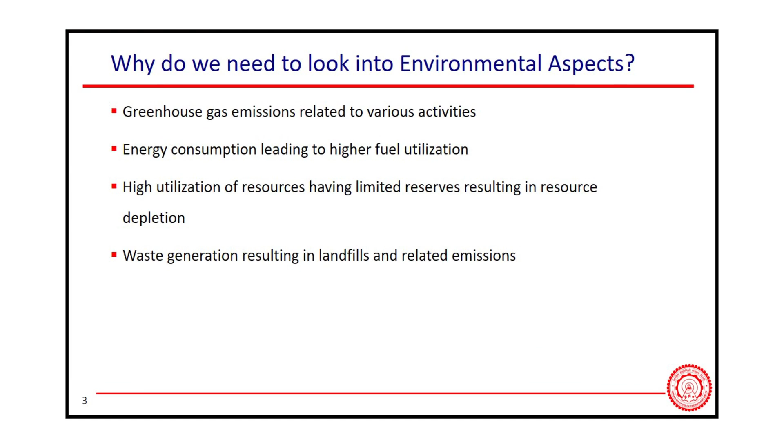So why do we need to look into these environmental aspects? First is the greenhouse gas emissions. We all know this is a major topic nowadays, a topic which is of a bit more concern when we talk about cement. Why? Because these greenhouse gas emissions lead to the global warming effect, and this global warming effect is leading to climate change. Thereby, this is a very important topic that we need to look upon.

Next is the energy consumption. Obviously we are utilizing resources, we are getting new products, thereby we are utilizing more energy, which requires higher fuel utilization. Next is the high utilization of resources, because we are getting new products, so we are utilizing resources. So we need to be energy and resource efficient when we talk about sustainability. The fourth point is waste generation. We all know the 3 R's: reduce, reuse, recycle. We talk about that because we want to reduce our waste, or we want to utilize the waste.

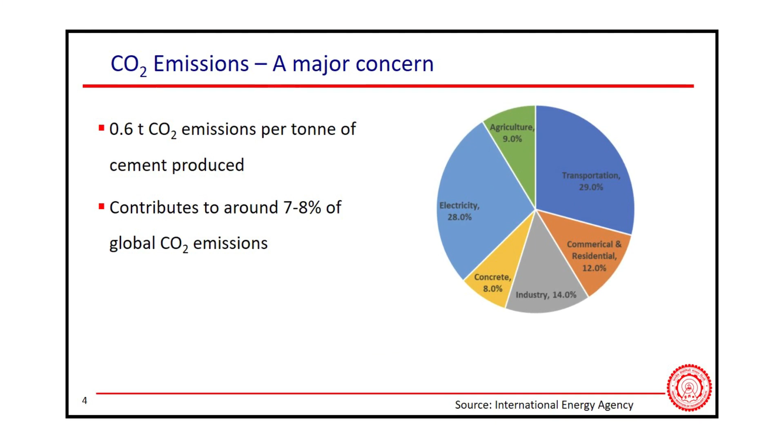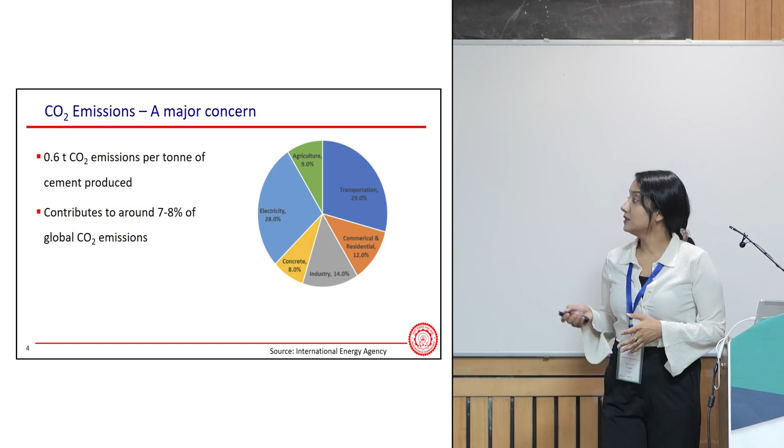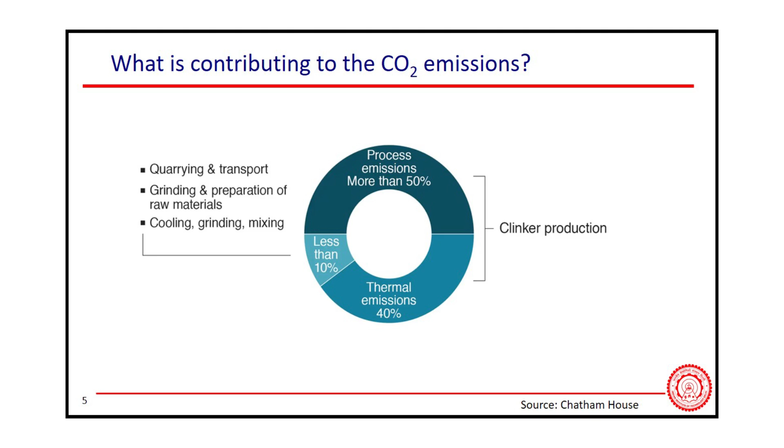Next, coming to the most important part when we talk about cement in terms of environment, is the carbon dioxide emissions. With every ton of cement produced, we get 0.6 ton of carbon dioxide emitted, contributing to around 7 to 8% of the total global carbon dioxide emissions. So what is contributing to these emissions? As my fellow mates and Professor Bishnoi have talked to you about the production process, we know the various steps. We can see here that clinker production has led to more than 50% of the carbon dioxide emissions among the various processes of cement production.

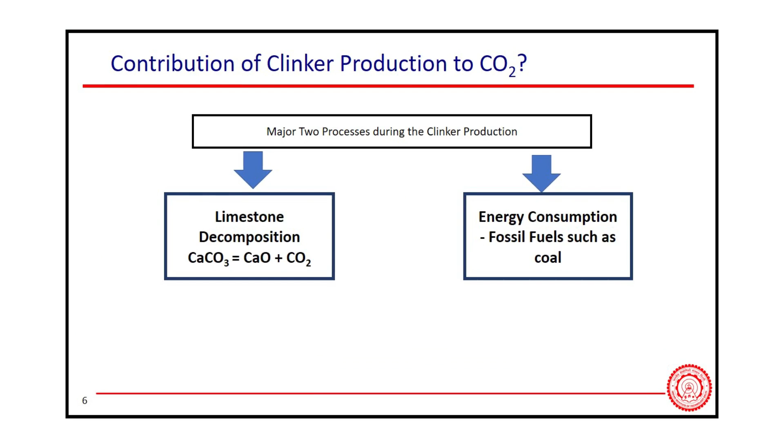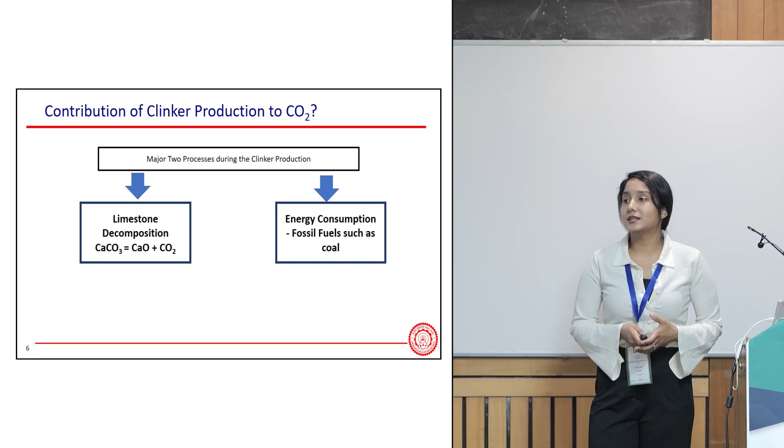So what processes lead to this carbon dioxide emission during clinker production? The major two are limestone decomposition and the energy consumption in terms of fuel. We are utilizing a temperature of 1500 degrees Celsius for clinkerization, and that leads to decomposition of limestone. With every molecule of limestone decomposing, 1 molecule of carbon dioxide is emitted. And for the 1500 degrees Celsius temperature, we need fossil fuel energy, and we are generally burning coal, which leads to higher carbon dioxide emissions.

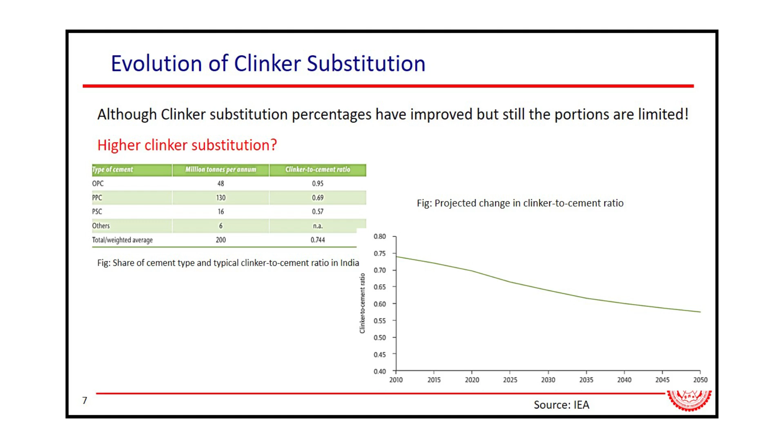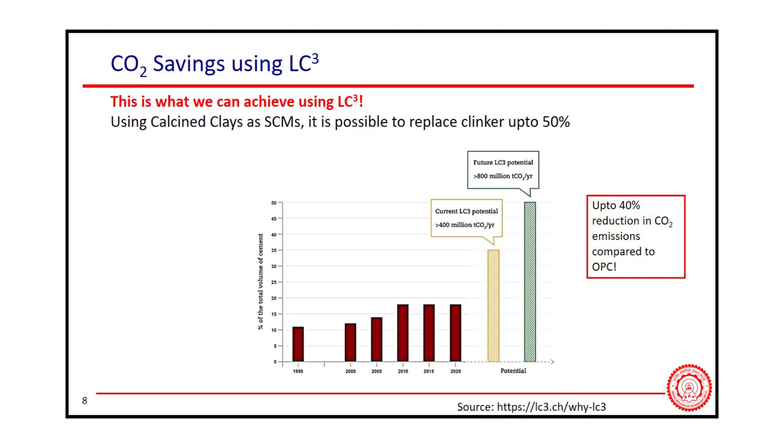So over the years there have been efforts to reduce the clinker and replace it with other products. You can see here that in OPC we have 95% clinker content, in PPC we come down to 70%, in slag cement we come down to 57%. Now the question is, how available are these products, so that we can use them not only now, but also in the future. In terms of LC3, we have seen that we can reduce the clinker up to 50%. And I'll be coming to the availability in the next few slides.

This clinker replacement leads to about 40% reduction in carbon dioxide emissions as compared to ordinary Portland cement. So here you can see LC3 cement has the potential of reducing carbon dioxide emissions by more than 400 million tons of carbon dioxide per year. And in the future, we can expect it to reduce emissions by more than 800 million tons of carbon dioxide per year, almost double.

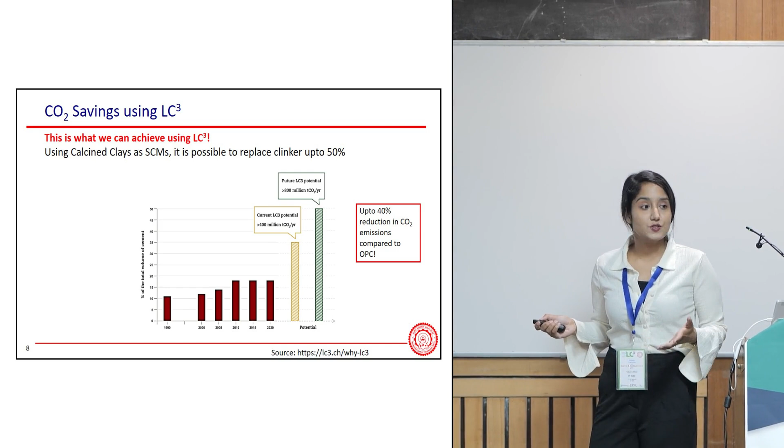So this is also being talked about by the 2050 net zero emission plan, where this clinker savings is contributing 11% to the overall net zero emission plan that we plan to achieve by 2050. That is the net zero carbon dioxide emissions.

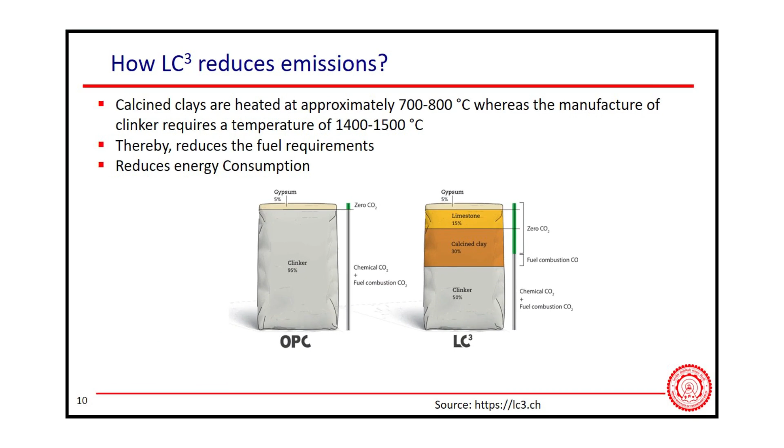So next, I won't go into detail on this because it has already been discussed: how LC3 reduces the emissions. Basically we all have seen till now that LC3 is composed of the main components of limestone, calcined clay, gypsum and clinker. The clinker has been reduced to 50% and the rest 50% is taken up by these products. Compared to OPC, which has 95% clinker and 5% gypsum.

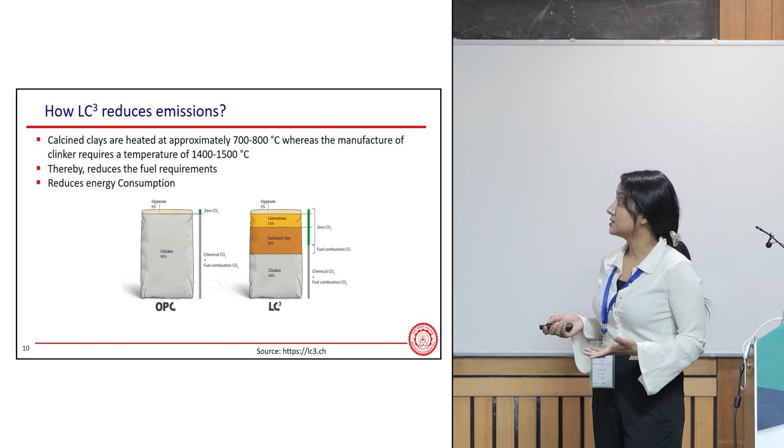And in calcination of the clay, we are using temperatures like 700 to 800 degrees centigrade. For the clinkerization temperature, we utilize temperatures like 1500 degrees centigrade. So that is quite high. So we need higher fuel requirements, thereby more emissions. And also in terms of the temperature, it is also leading to more limestone decomposition.

Due to which, for the transportation emissions, we don't need to go very long distances to get this clay or the limestone. As has already been talked about, we need low grade clays, we don't require very high grade clays, and they are very locally available. The only thing that we need is the effort to find them, because these are not actually shown on the maps. So this is also leading to resource efficiency in terms of LC3.

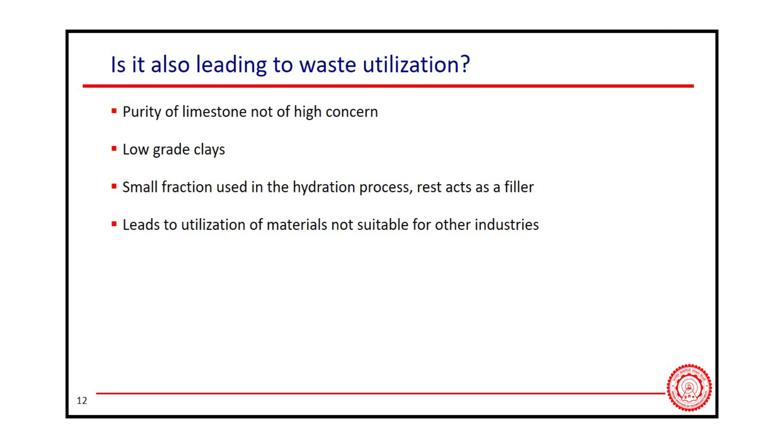So the next point is, is it also leading to waste utilization? As the points have already been raised here, we need not go for very high purity limestones, we need not go for very high grade clays. Also Professor Krishnan has talked about how we can also use marble dust, and it has shown great results. So we can see that it has led to waste utilization when we are talking about sustainability in terms of the waste.

Goal number 9 basically talks about industry, innovation and infrastructure. Here, LC3 is an innovation for the industry. It is a new product, so thereby it is supporting this goal. Its composition is new, and it has newer aspects to it. Next is goal number 11: LC3 contributes to sustainable societies, because we are reducing the carbon dioxide emissions, with less energy utilization and low consumption of fuels.

Then coming to goal number 12, responsible consumption and production: yes, because we are utilizing resources which are abundant and locally available. We have reserves of them. So it is also supporting goal number 12. Goal number 13 is climate action. Reducing the CO2 emissions may lead to less global warming effect, and may reduce the climate effects that we have now due to global warming.

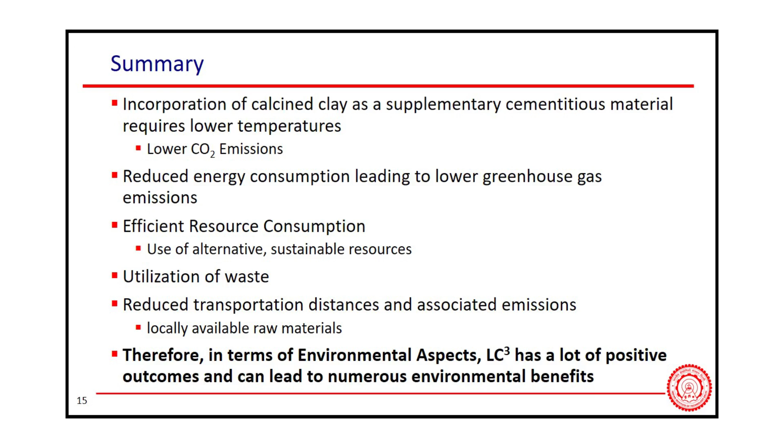So to summarize my presentation, I would like to say that LC3 cement is a very sustainable product in terms of the environmental aspects, because it is leading to lesser CO2 emissions, reduced energy consumption, efficient resource consumption, and also utilization of waste.

After this, in terms of LCA, we will be looking at what environmental impact it can have. That will be shown to you by Professor Gettu. And then we will be looking into the economic aspects of sustainability by Dr. Neha.